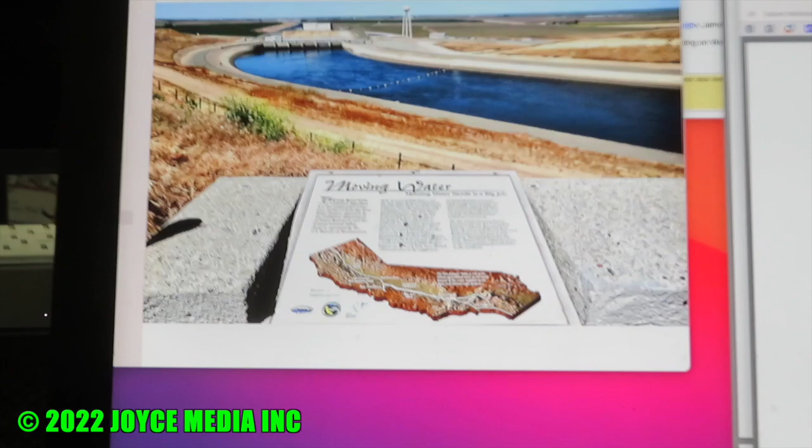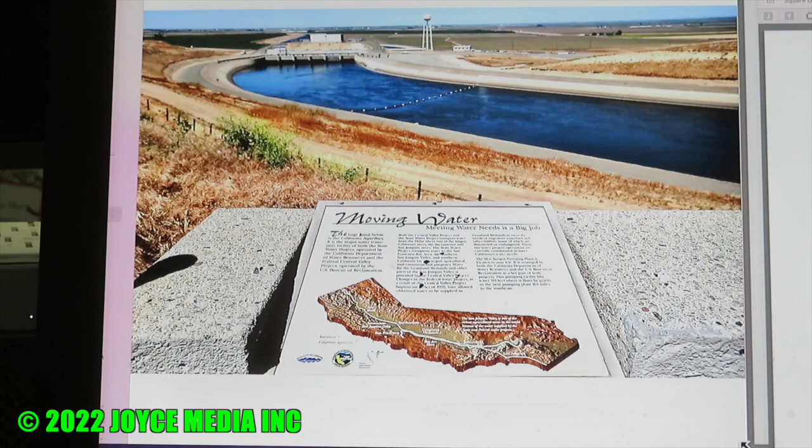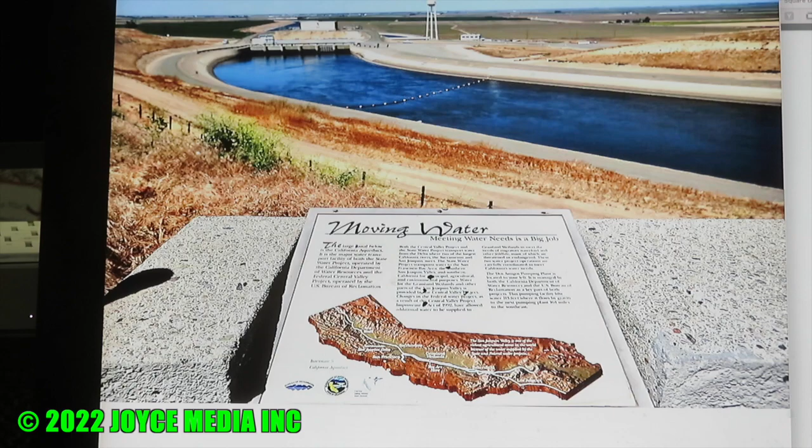Roll call: Division 6, Audrey Miller, here. Division 5, Robert Parris. George Lane, here. Division 1, Shelley Sourceable, here. Division 3, Frank Donato, here. Division 2, Keith Dyas, here. Dwayne Chisholm, here. Tilden Kim, here. Holly Hughes, present. Thank you.

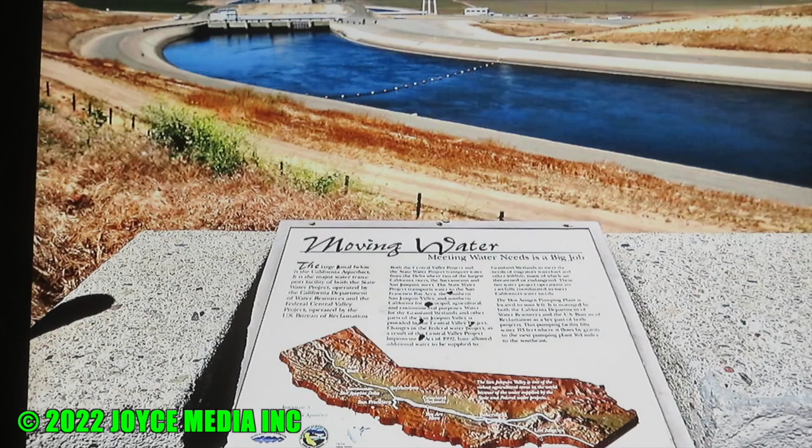Item 3, voluntary roll call, public roll call. If any member of the public wishes to introduce themselves, please feel free to do so now.

Vincent Dino, Palmdale Water District, introduces himself. Hello, this is Vicki Roush with the Antelope Valley Resource Conservation District. Thank you, Vicki.

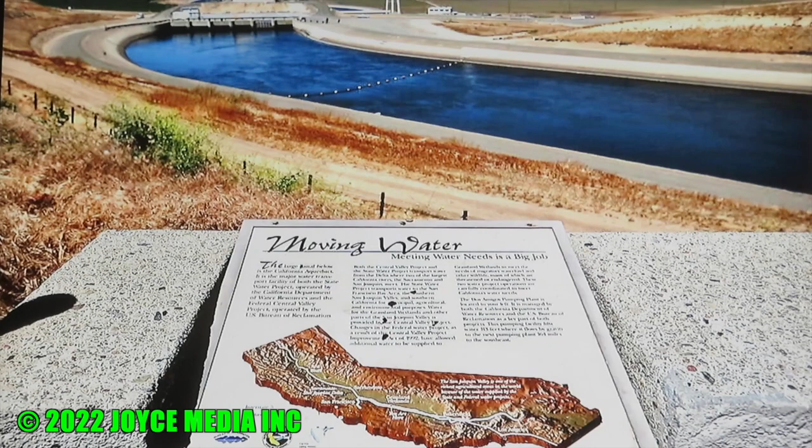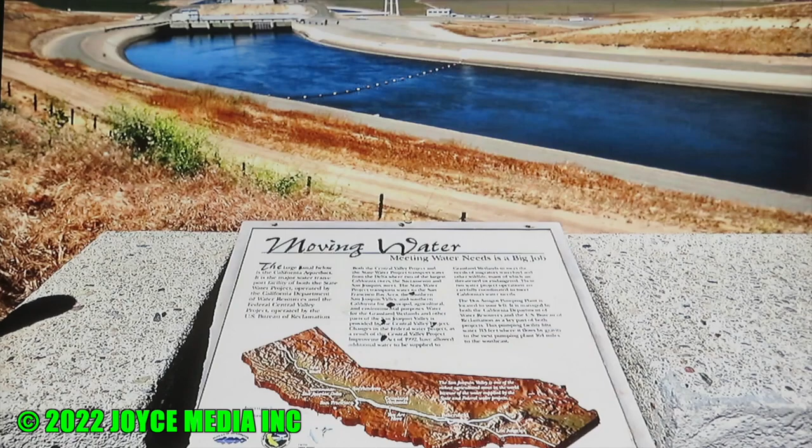If there are no others, we will move along to item 4, public comments and period open to the public. If anyone wishes to address the board on any item that is not on the agenda, please feel free to do so now.

Hi, this is Vicki Roush again. I would just like to make the board aware that the Antelope Valley Resource Conservation District is now launching our lawn reduction rebate program, and we are offering $1 a square foot for lawn removed. We also have plants available from our nursery and design assistance, and we will soon be having our designs available. So if you want to know more information, you can see our website or contact me. Thank you, Vicki. That's great news.

Are there any other public comments? Hearing none, we'll move along to item 5.

Do I have a motion to adopt tonight's agenda? This is Director Miller, I'll move to adopt the agenda. Thank you. This is Director Sourceable, I'll second. Thank you, roll call vote please.

Gary Van Dam, yes. Audrey Miller, yes. Robert Parris, yes. George Lane, yes. Shelley Sourceable, yes. Frank Donato, yes. Keith Dyas, yes. The measure passes. Thank you.

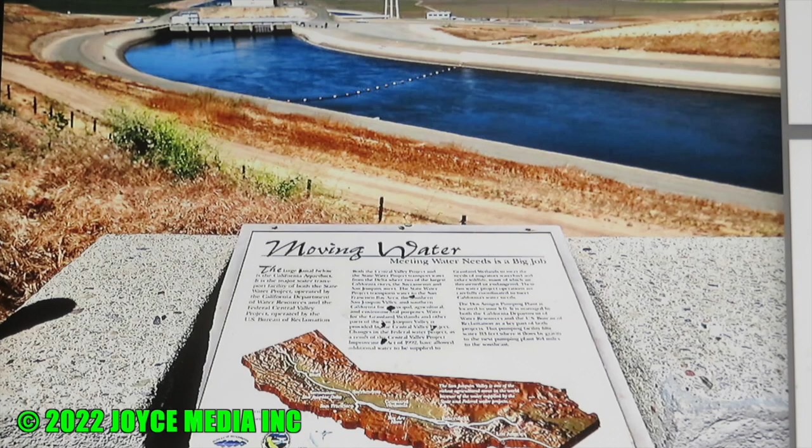Okay, we'll move along to item 7, consent calendar. Do I have a motion to approve tonight's consent calendar? So moved, Mr. President. Second. Could we have a roll call vote, please?

Gary Van Dam, yes. Audrey Miller, yes. Robert Parris... George Lane, yes. Shelley Sorsabal, yes. Frank Donato, yes. Keith Dyas, yes. The measure passes. How many voted, 5? Six, I just didn't hear back from Rob. This is Rob, I voted yes. Thank you, Rob.

Okay, item 8A, High Desert Water Bank Committee. Director Donato, do you have a report? Yes, we do.

Director Donato, would you like me to present on the High Desert Water Bank Committee report here? Yeah, why don't you go ahead and get started? Okay, can we take just one minute right there? Yeah.

Hello? Can you hear me? Yes, we were just saying goodbye to Joe. Oh, well, why don't you tell... okay. Okay, we can proceed. All right, thank you.

Thank you, directors. Good evening, President Dyas and members of the board. This is Engineering Manager Justin Lipsay to provide the monthly update on our High Desert Water Bank project.

Can you wait a second, Justin? I don't see anything on our screen. How about everybody else? Can you see the screen? Now I can, yeah.

As Justin mentioned, the contractor is Zim Industries, also called Bakersfield Well and Pump Company. The project was awarded February 22nd, and the notice to proceed was issued March 21st.

The contractor has submitted a preliminary schedule, and they're planning to use 2 drill rigs to finish the project. They've submitted a schedule indicating they're going to try to finish before the project completion date of December 6th.

However, they are still waiting for the Los Angeles County Department of Public Health permits to drill those 6 wells. So far, there's been a little back and forth communication between the contractor and the Department of Public Health, and hopefully shortly they'll get the permit, and then the contractor will firm up the schedule and we'll get a final schedule.

But in the meantime, this contractor means business right now. He's not sitting there waiting. He's been very aggressively preparing shop drawings to submit. To date, they have submitted 14 shop drawings, so they're well past the halfway point in that category.

So unfortunately, both of the 2 projects are not on site yet. We don't have any pictures at this point. We're hoping that in the coming months we'll have pictures and share them with the board in our next update.

And we did recently just invoice them for another about 1.1 million on this project to replenish that account as well.

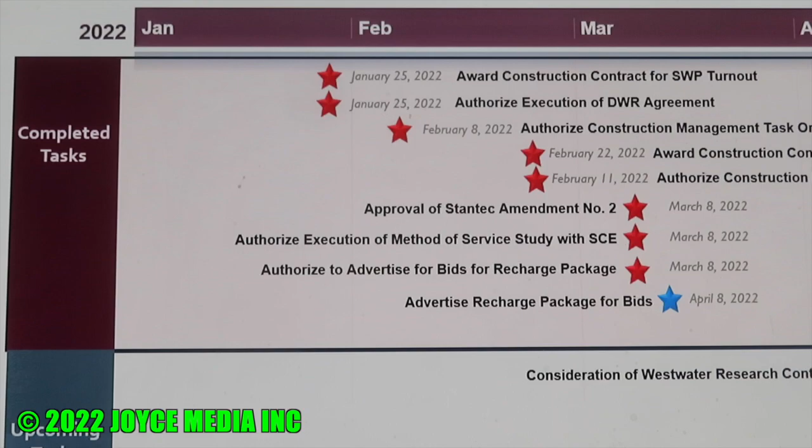And then you can see the small triangle at the top indicating today's date—maybe that's actually, looks like I didn't update the date on that, apologize for that. But today we're looking at consideration of the WestWater Research contract I mentioned earlier, and Assistant General Manager Knudsen has that on the following slide.

Looking forward into May, we have the three items I mentioned at the beginning: approval of Stantec's amendment and Kennedy Jenks's task order for construction management, both related to the award of the Recharge Basin construction project. The due date for those bids is May 17th, so that'll be coming up in about a month or so. That's all I have before turning it over to Assistant General Manager Knudsen. If anybody has any questions, I'd be happy to answer those.

All right, thank you. Thanks, Justin. Thanks.

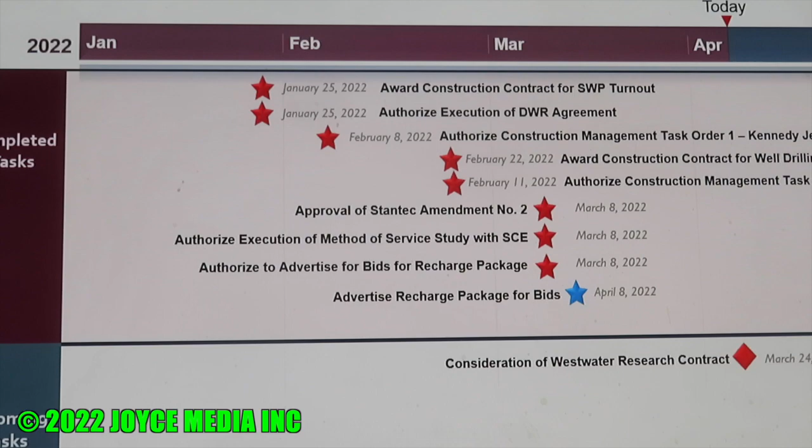Director Donato, would you like to introduce this item? Yeah, so we're going to discuss 8A2.

Consider possible action for O, M, and R and management costs systems for the High Desert Water Bank, not to exceed $19,890. Matt, why don't you give us a little bit of an overview for the rest of the directors?

Okay, great. Thank you, Director Donato. Good evening, this is Matt Knudsen, Assistant GM for AVEK. A little background: included in your packet on page 52 is a brief staff report, and attached to that is the proposal from WestWater Research that we're seeking approval from the board this evening.

As part of our 2019 agreement with Metropolitan Water District for the construction of the High Desert Water Bank, it also covers ongoing operation, maintenance, and repair costs, as well as management costs associated with operating the bank. Metropolitan is to reimburse AVEK 100% of our operation, maintenance, and repair or replacement costs, including labor, overhead rates, equipment use, materials used on site, and electrical costs associated with operating the recovery wells. Each year we have to submit an estimate of the annual cost for operation, maintenance, and repair to Metropolitan.

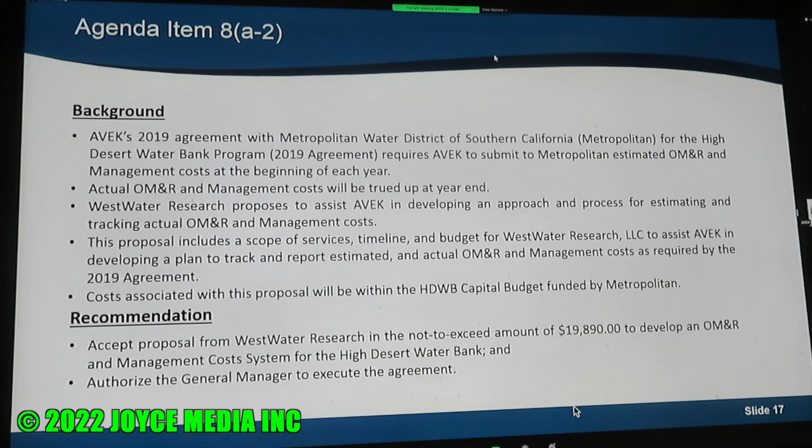Thank you for the presentations. That concludes my report, thank you very much, Chairman Donato. Item 8B, Public Information Committee. Chairman Lane, do you have a report?

Yes we do, and I'm going to ask Matt if we would proceed with that. Okay, thank you Director Lane. One item that came out of the recent Public Information Committee that met last week is a presentation and a board action to accept and file the 2021 annual water quality reports for both LA County and Kern County. At the committee, we went through the presentation prepared by Lab Manager Jordan Ray, who's here this evening.

In your board packet on page 58 is a staff report and a copy of the annual water quality reports that lab staff prepares and distributes to our customers. I'll turn it over to Jordan Ray, who has a brief presentation on the good results from our water quality. Take it away, Jordan. Good evening, board members. I'm going to go over a little background of the requirements and then a summary of the findings.

So I'll start with some background on the requirements. The 1996 Safe Drinking Water Act amendments mandated that drinking water providers prepare and distribute a consumer confidence report, and this rule took effect in 1998. Since we're a wholesaler, we don't have to prepare a full CCR like most retail water suppliers, which requires them to prepare more material for customers, such as multiple languages and historical data. Public water systems have to prepare and distribute their CCRs by July 1st, and since they include our data in their reports, we like to complete our annual water quality report ahead of time, giving them plenty of time to meet their deadline.

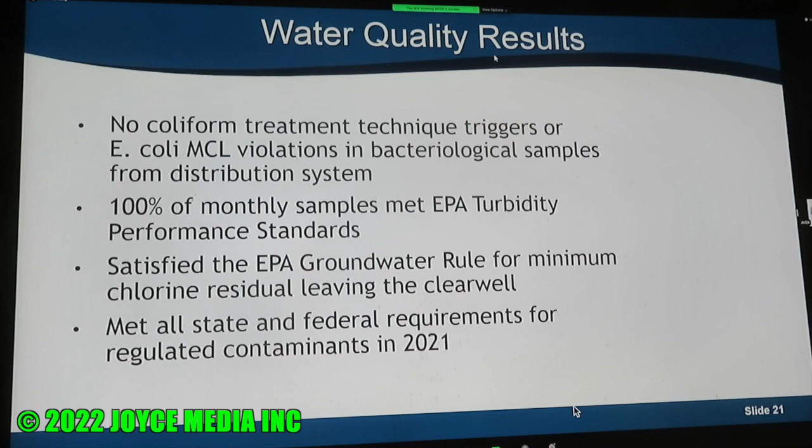So next we have some tables for our Kern and LA County disinfection residuals, precursors, and treatment byproducts. All results fall well under the limits set by the state. As you can see on the graph, the chlorine MCL is 4 ppm, and averages for both counties were just above 1 part per million. Also, bromate, a disinfection byproduct, had a highest running annual average of 0.82 ppb, and the MCL is 10 parts per billion.

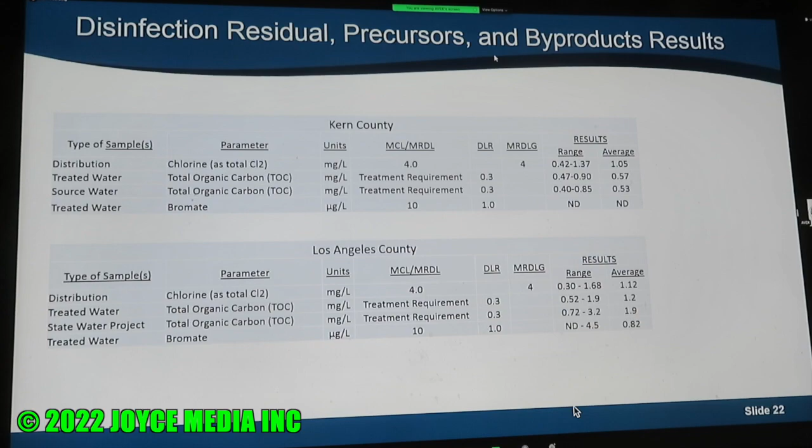So lastly, we have a graph of THM locational running annual averages, and operations did a really great job last year keeping these low. Internally, AVEK sets a goal of 64 ppb for our customers, which provides them a 20% buffer for their own compliance. The highest running annual average we had at any location this year was 50 micrograms per liter. We finished the year with maximum running annual averages of 20 micrograms per liter in the Kern County system, and 41 micrograms per liter in our LA County system.

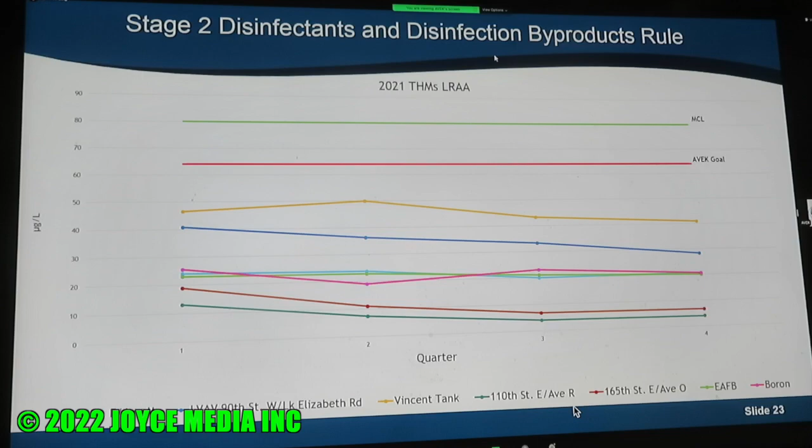So that concludes my report. I'll take any questions if you guys have any. Thank you. Thanks.

So I think what staff is looking for is a motion and a second and a vote to accept and file the 2021 annual report for LA and Kern counties. Director Lane, so move, Mr. President. Thank you, Mr. President, this is Rob. I will second that motion. Thank you. Any questions or discussion?

If not, could we have a roll call vote, please? Gary Van Dam, yes. Audrey Miller, yes. Robert Parris, yes. George Lane, yes. Shelley Sorsabal, yes. Frank Donato, yes. Keith Dyas, yes. The measure passes unanimously.

Thank you very much for the great report. And it shows that everyone has contributed to these excellent water quality results. Next, item 9, General Manager's Report.

Matt? Yes, good evening. I'm going to cover the GM report for Mr. Chisam. He is on the line, but he may have some audio problems. So what we're going to start doing as part of the GM report is have various department managers give updates to the board on a monthly basis, rotating between engineering, operations, water quality, HR, etc. We thought we'd start with the engineering department this month, giving an update on a couple of ongoing capital improvement projects. Justin will start this portion off, and then I'll conclude with the GM report.

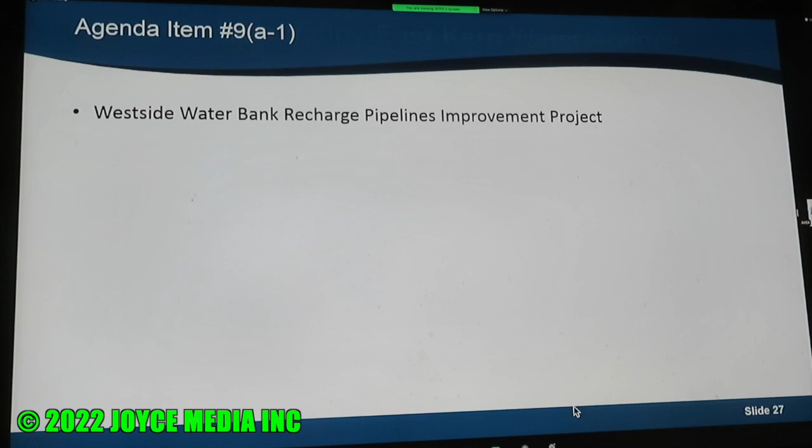Sounds good. Thank you, Matt, and good evening again, members of the board. As Matt mentioned, we've got 2 construction projects going on right now. I will start with our Westside Water Bank Recharge Pipelines Improvement Project. To get everyone oriented, I've got a map here. So you can see, I'll use my cursor here.

The red box here is the Quartz Hill Water Treatment Plant, as well as where our administration building is here in Palmdale. And out here near 140th Street West and West Avenue B is the location of our West Side Water Bank. You can see where that is.

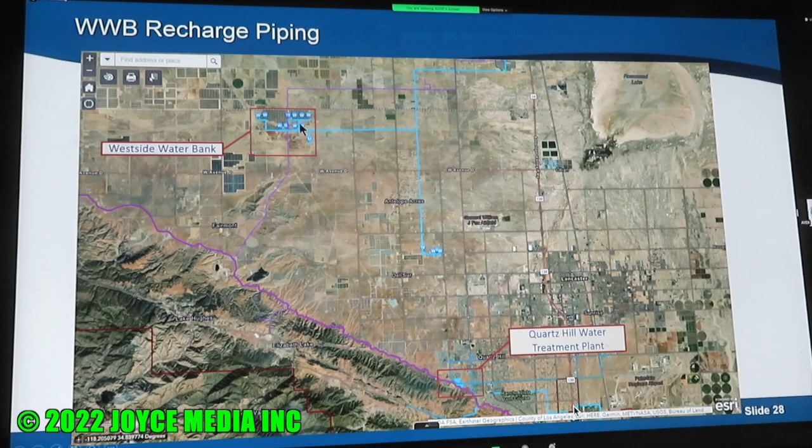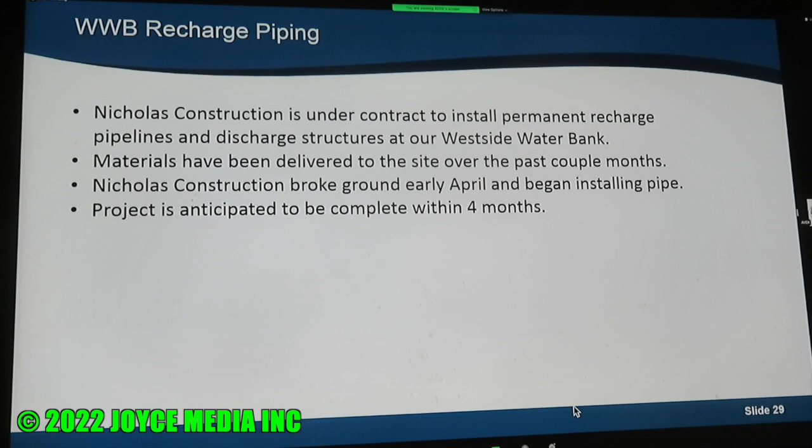So we've got a project that went out to public bid and was awarded to Nicholas Construction to install permanent recharge pipelines and discharge structures at our West Side Water Bank. Materials for that project have been delivered to the site over the last couple of months, and Nicholas Construction broke ground in early April to begin actually installing pipe out there. This project is anticipated to be completed within the next 4 months or so, and they are off to a very good start. They've installed probably 3,000 or 4,000 linear feet of pipe just in the last about 10 days or so. So they're making very good progress.

And I've just got some photos from the field. So here you can see some of their equipment. This is when they very first mobilized out to the site.

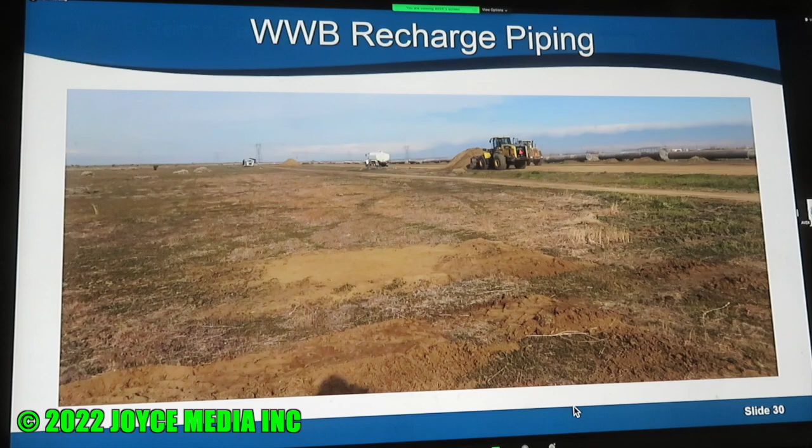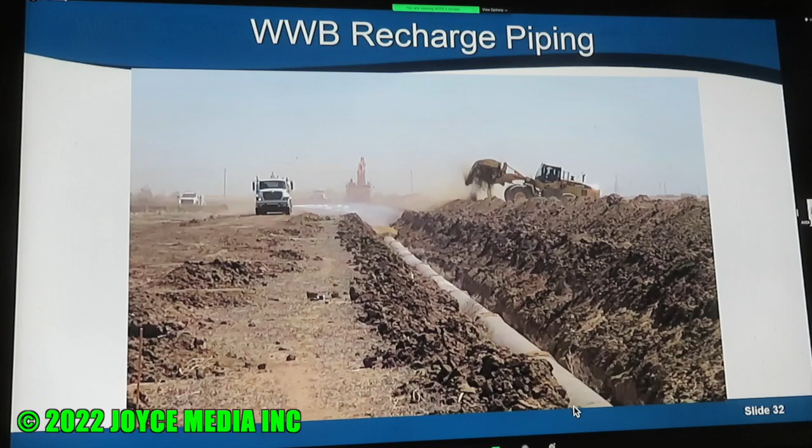Some more pictures from the field. You can see we had some very windy weather earlier this week and late last week, and you can see the dust blowing around, but it really hasn't hindered their progress at all. They're continuing to work, which is good.

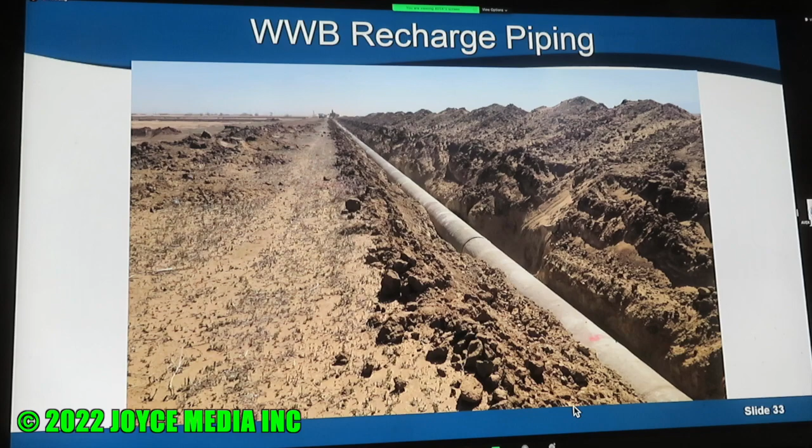You can see a long stretch of pipeline laying there ready for backfill. We do have a construction manager, MC Engineering. They were also the engineer of record for this project. They're out in the field with them every day, making sure the project's being built according to our specifications and plans. Another photo here of a pipe getting ready to be laid into the ditch.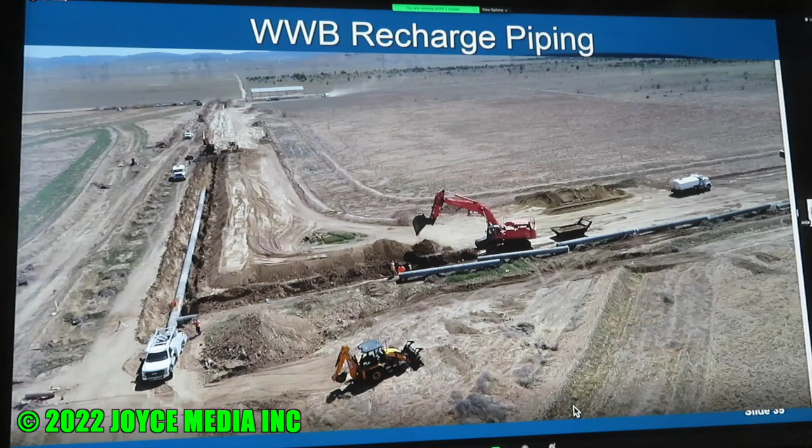That's pretty much it, just have some photos from the field, and we will continue to update the board on this construction project as we move forward. But so far everything's going good. They're ahead of schedule, actually, at this point in time.

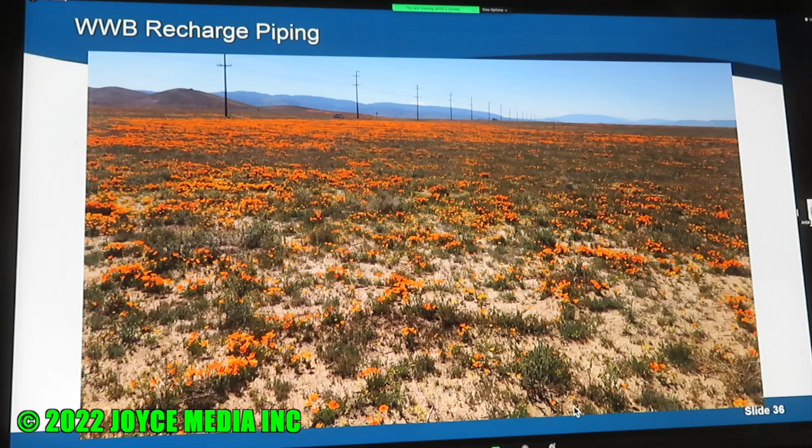Any questions on that project before I move on to the next one?

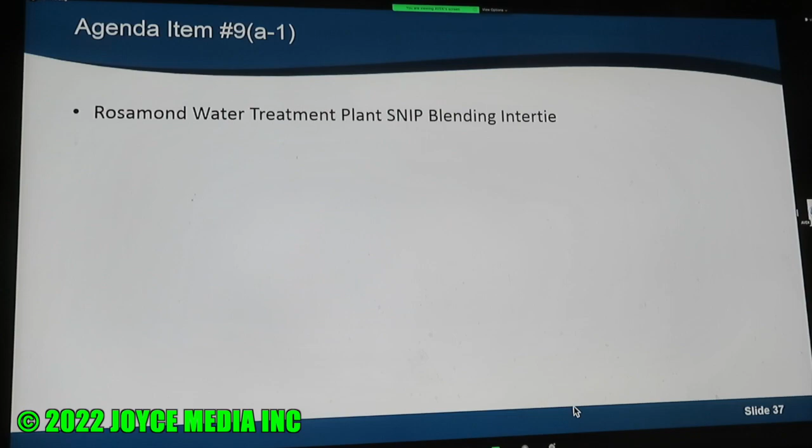All right, lastly here I'm going to go through some photos again of our blending intertie at the Rosamond Water Treatment Plant. This would allow us to bring recovered, banked State Water Project water from our West Side Water Bank into the Rosamond Water Treatment Plant's clear well reservoir and blend down for water quality purposes in the clear well there, which we don't have the ability to do just yet.

This project was out to public bid and awarded to WM Lyles to install that blending vault. The vault and piping has all been completed, so most of the physical work is nearly done. We've got a little bit of electrical work to complete before they're ready for testing and programming by AVEK's programmers. So that's very close to being done.

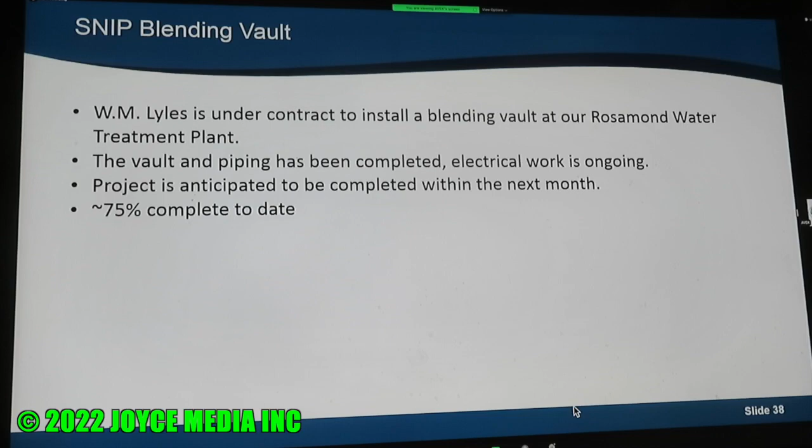Expect that to be completed within the next month. Per billing, they're about 75% of the way completed, but actual work in the field is probably closer to 85 or 90%. We just haven't received their most recent invoice yet, but that project is going very well.

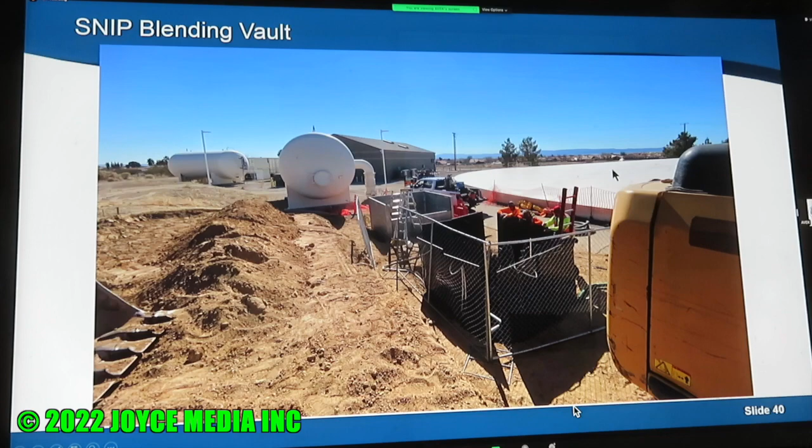So that blending vault is being installed right here, and there's an existing pipeline that they cut into to install this flow control and metering vault that would allow us to meter and control flows into the Clear Well Reservoir there.

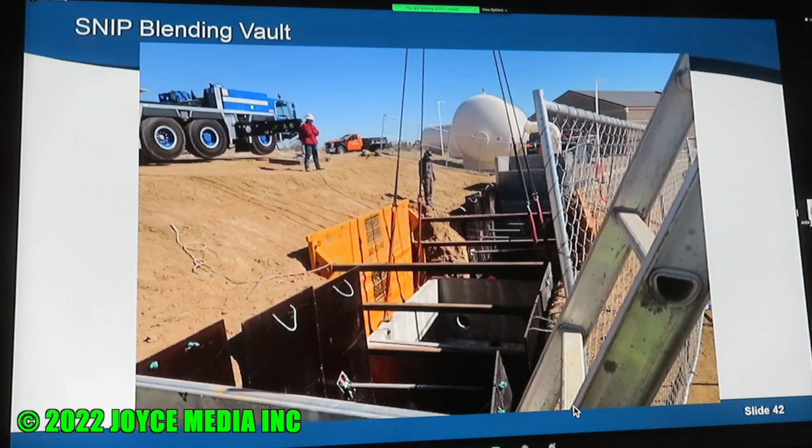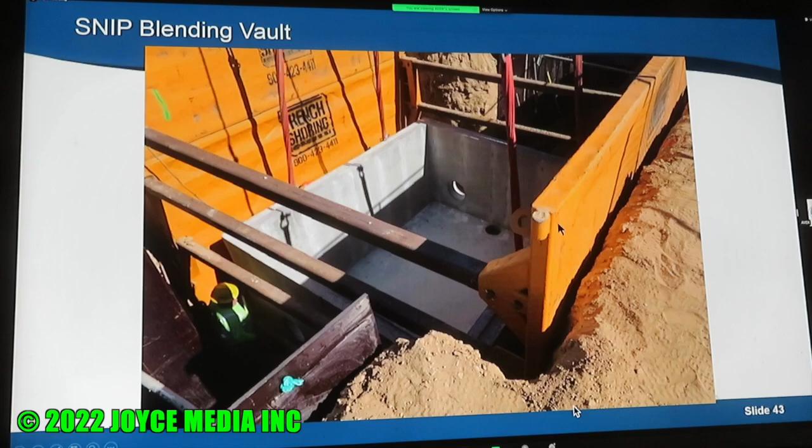You can see they're shoring in place. And then there's another angle of that same vault. You can see the hole in the wall right here where one side of the pipe would come through, and there's another one that's kind of hidden here, but where the other side would come through.

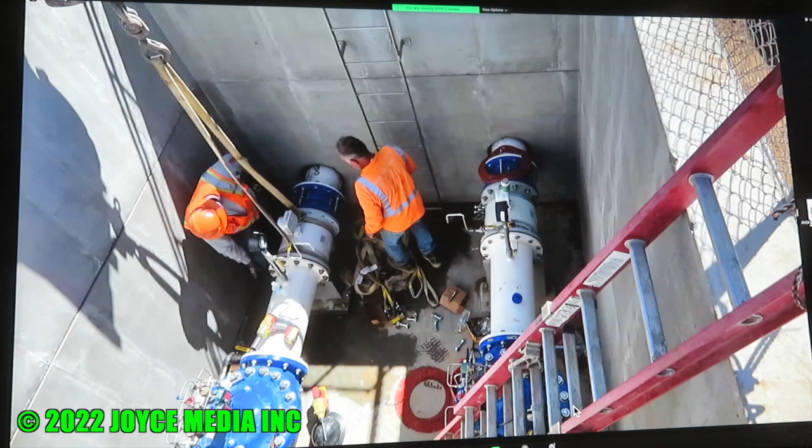There it is, completely in the ground with the surrounding soil backfilled, and the workers down in the bottom of the vault putting in the pipes that run through it, as well as the Cla-Val valve, flow control valves, some isolation valves, and the flow meters.

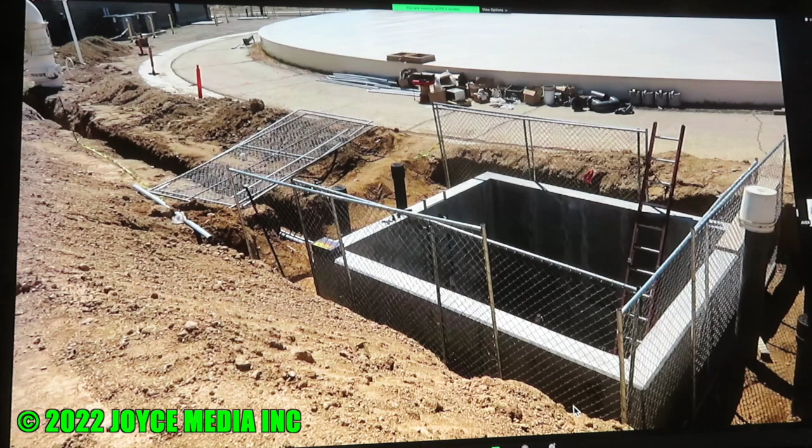This is just showing the remaining work they have to do, which is the electrical work. They've got this trench going over towards the pump station building where they're going to complete their electrical connections. You can see some conduit laying in the trench there.

That is it for the construction updates for those two projects. Both of them are going very well. One of them is nearly completed, and the other one we've got a few months to go. But everything's going really good. These are going to be really good projects that will really help our operations staff.

What's the total cost for this blending vault? The total bid price of this was $571,050, and grant funding includes that project. Any other questions? All right, thank you very much.

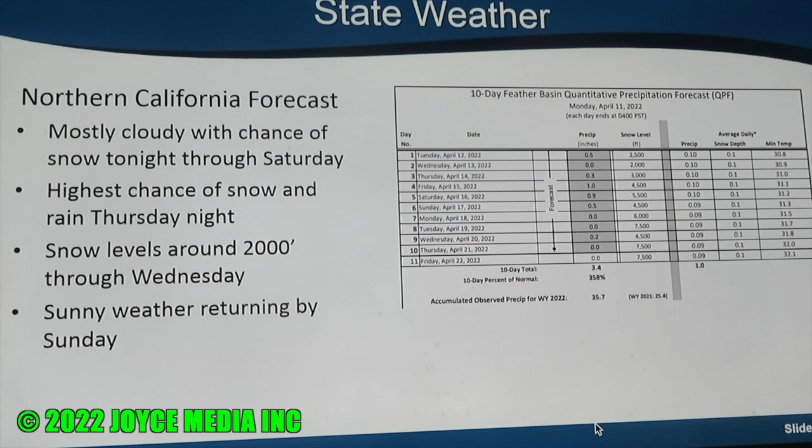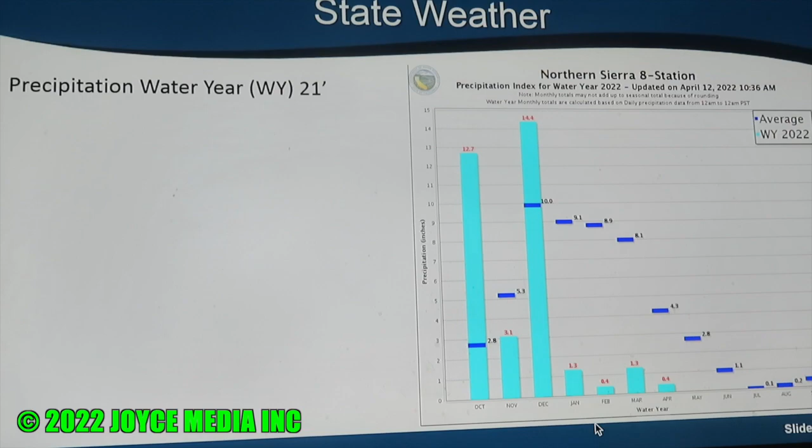Hey Matt, can you go back one slide? So what I'm seeing here, if we don't get any rain, big stuff up north, the San Luis will be dry. What are they going to do? This is just the middle of April, and we don't get any real rain in the north until sometime in the fall. So is there going to be rationing or something?

As you can see there, we're currently for this time of year at 54% of average. The red line is the average, the blue bar is where we're currently at, and that's 54% of the average. So all the water planned to be delivered to meet the 5% allocation for the State Water Project contractors, as well as the health and safety allocation, is already accounted for in San Luis. That's how they can allocate the 5% plus the health and safety water.

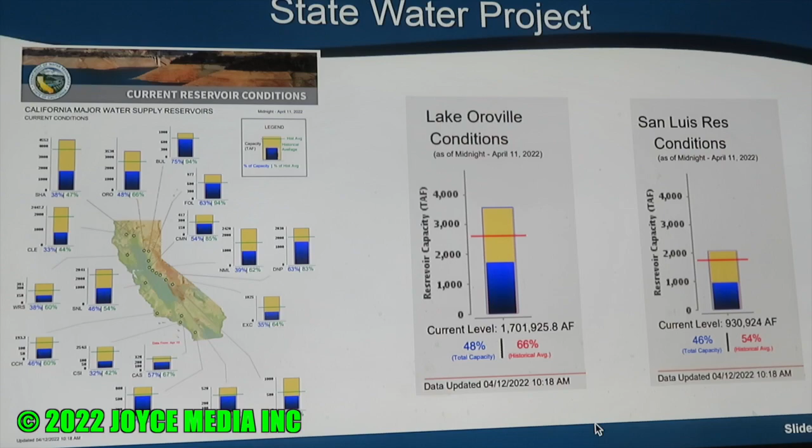But they're basing that on weather conditions, right? No, I think that's based on if there's no more inflow into San Luis, they have enough in there to meet the 5%, any carryover water, and the health and safety allocation. So any bit of precipitation and additional inflow from this point on just helps the State Water Project. What about evaporation? I'm just saying, if we had extended heat waves come in, it could drop that considerably. Yeah, they take into account evaporation, not only in San Luis Reservoir, but throughout the State Water Project system, because evaporation occurs within the canal as well as the reservoir. That's a good question, though. Thank you.

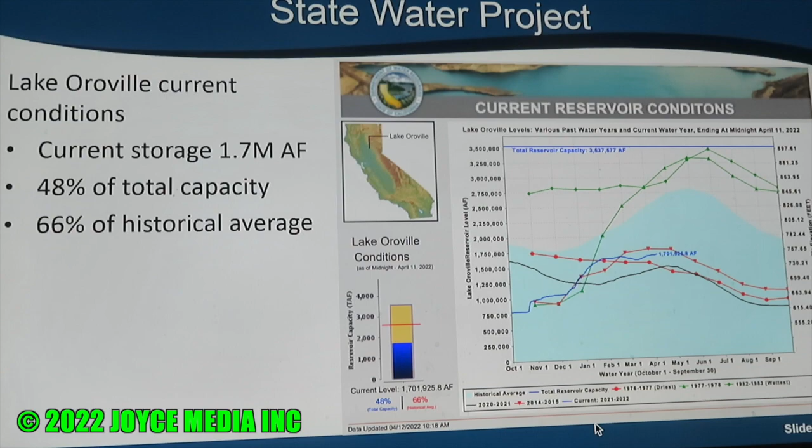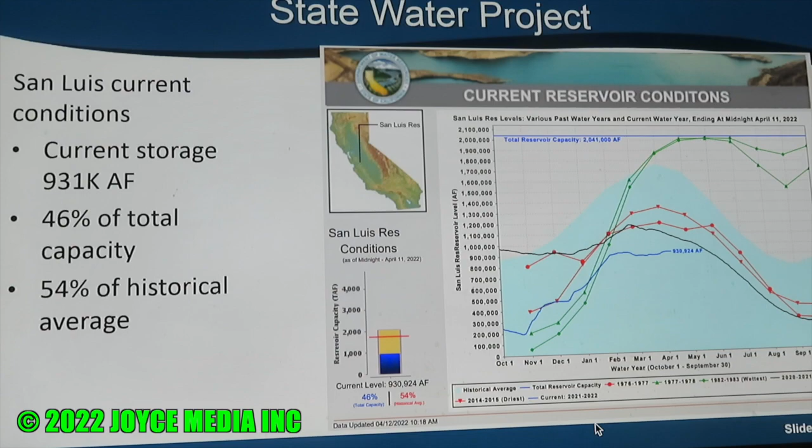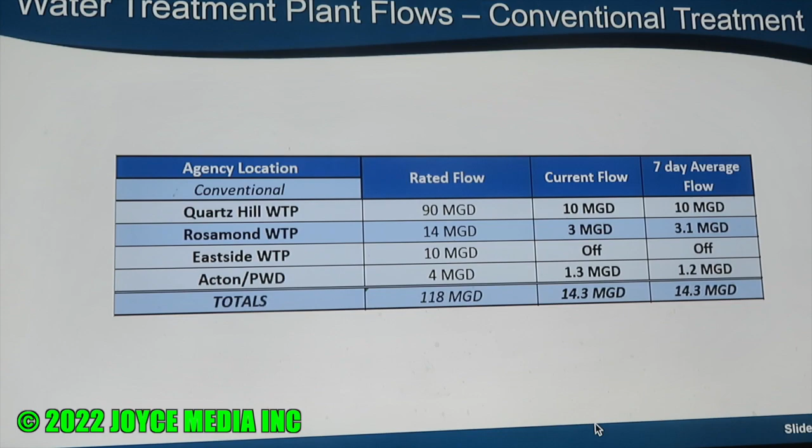Closer at home, current treatment plant flows for our conventional treatment. Quartz Hill Water Treatment Plant is currently flowing 10 MGD, pretty consistent for the last 7 days. Rosamond Plant is flowing about 3 MGD. And what we're purchasing from Palmdale Water District for delivery to the Acton service area is about 1.3 MGD, for a total of 14.3 MGD treated through our various treatment plants.

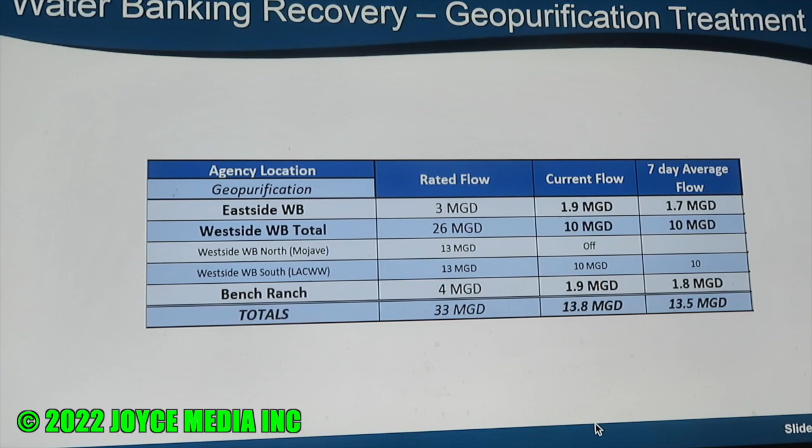As far as pumping or recovery from our water banks, Eastside Water Bank is currently pumping about 1.9 million gallons per day, close to our average 7-day flow. Westside Water Bank is split between what flows north towards Mojave and the North Feeder, and what flows south to 80th and H for the interconnection with LA County Waterworks, totaling about 10 MGD. We're also flowing a little out of Bench Ranch, near 80th Street West and Avenue H, about 1.9 million gallons per day, for a total of about 13.8 MGD recovered from our water banking operation.

As far as putting water back into the ground, we don't have any import water supplies available, but we are flowing a little to the Eastside Water Bank to ensure we're matching what we're recovering through that project from the recovery wells, about 4 acre feet per day.

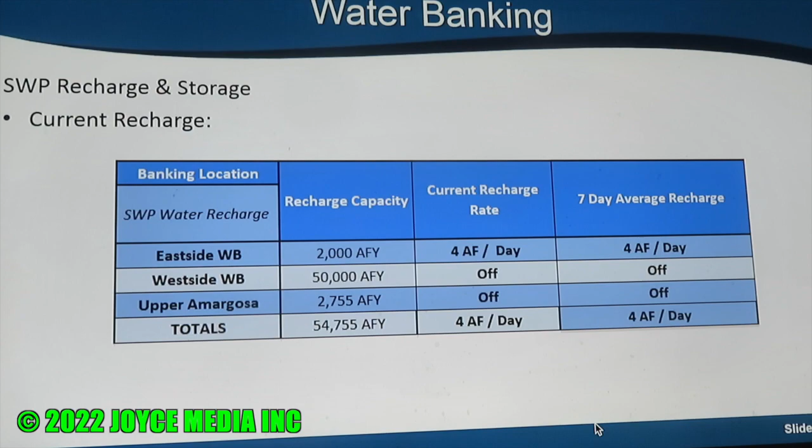Operation and maintenance updates: groundwater recovery is about 50% of capacity between all the sites. AVEK has increased the Eastside Water Bank recharge rate to 28 acre feet per week, that's 4 acre feet per day, matching our recovery rate as mentioned.

Happy to report that we have a new electrician who started about a week ago. His name is Devon Watson, a nice young gentleman who's very excited to be here at AVEK, and we're happy to have him. We hope he does a great job for us.

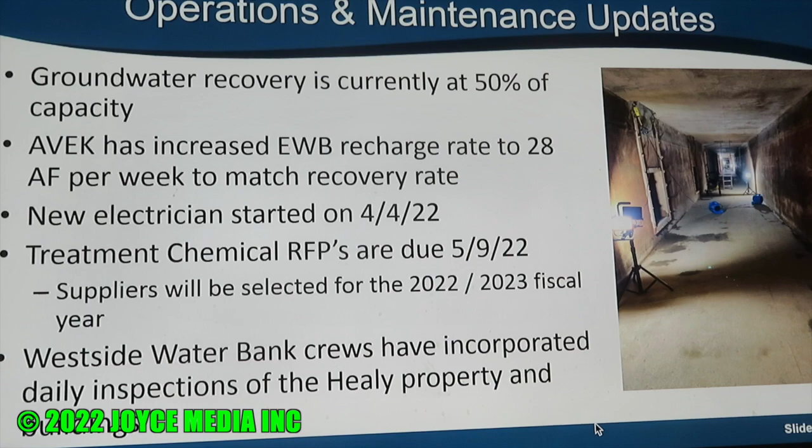We have an RFP out for our treatment chemicals for the upcoming fiscal year. Those bids are due the 9th of May and will be included in our upcoming fiscal year budget. As for Healy Ranch, we closed escrow on that property, and we've incorporated duties for the Westside Water Bank staff to check that property daily, making rounds throughout the property and buildings.

Update on water quality, in addition to what Jordan reported earlier: the upcoming task for that department is updating our bacteriological sample siting plan for this year, and we're getting ready to start the second quarter compliance sampling tomorrow.

Upcoming events: we have the AV Watermaster Board meeting scheduled for Wednesday, April 27th at 10 a.m. via Zoom, so mark that on the calendar if it's not already there. That's about all I have to report, unless there are any questions.

Item 10, are there any director's reports? Director Miller: I wish to report that I did attend the Palmdale Water District meetings last night. They have a new director for Division 1, Mr. Kellerman, and in their main meeting they implemented stage 2 of their water shortage contingency plan. That's all I have to report.